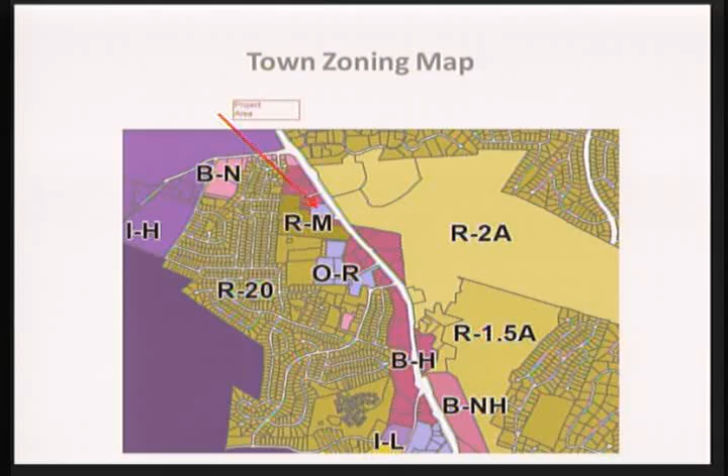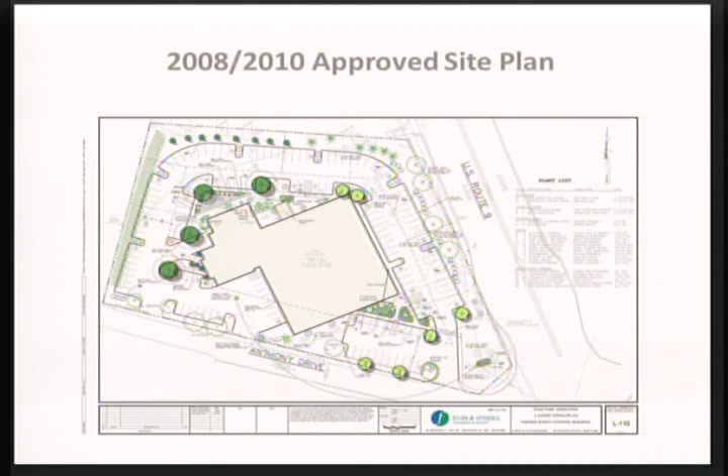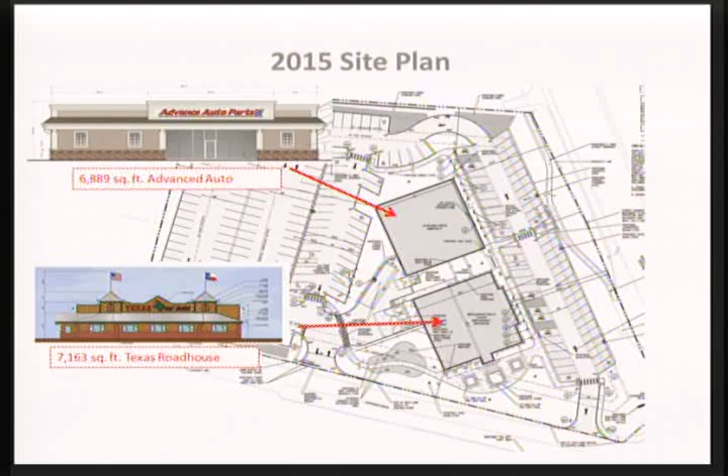Unfortunately, that project never came to fruition. So we're back before you in 2015 to receive site plan approval for 2 buildings. The first building, to the north of the site, is a 6,889 square foot Advance Auto building, and the second building, to the south of the site, is a 7,163 square foot Texas Roadhouse.

Just as a refresher, there are 192 parking spaces. We are utilizing the existing curb cuts off of Anthony Drive, which, as everyone recalls, is a private road for access into the site. We made a modification, Mr. Chairman, to the angled parking spaces in the front of the site. Previously those spaces were 90-degree with one-way access in, and there was concern about the ability of cars backing out to ensure they were going in the proper direction.

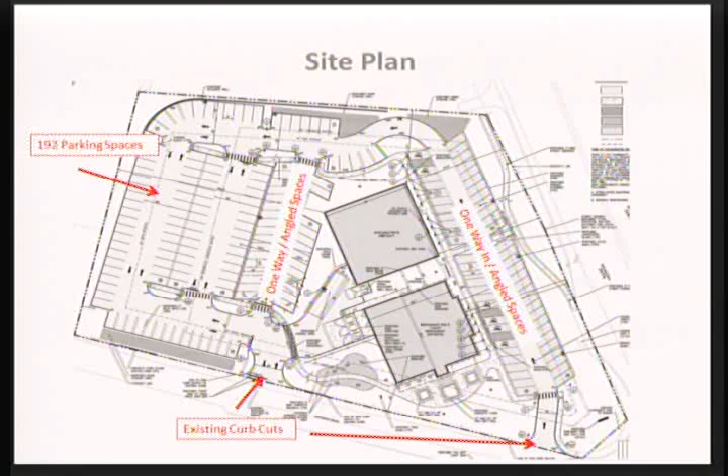So we went ahead with your board and your traffic consultant's recommendation and modified those so they're all angled parking spaces, one way in. We also modified the parking spaces in the back of the buildings for one-way as well. And the area in the front, as a reminder, is where we're getting our stormwater credits with the porous pavement.

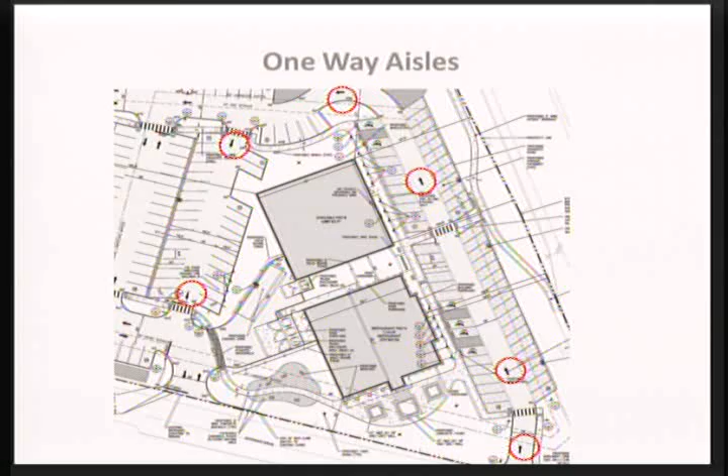For the one-way aisles, I want to touch on the signage and striping since there were some questions about that. We have arrows on the ground to direct people as they move through the site in the one-way direction. We have one-way signs on either end to assist people coming through, and do not enter signs in case someone comes to the westerly entrance in the back, so they know immediately it's one-way, do not enter, and go to the back for parking.

For the utility plan, since this was nearly an adaptive reuse of an existing building, the water and sewer are already on site. This would be the new water service, simply cut from the last building, so there would just be an extension of that water service and municipal sanitary service into the site as well.

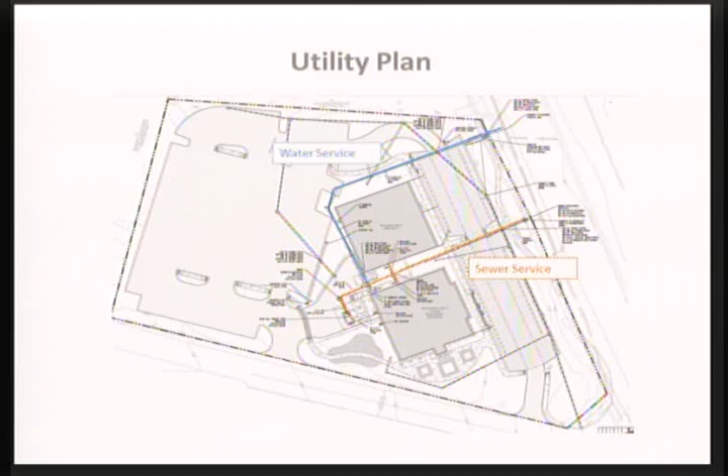For landscaping, blue represents the new sidewalks we're proposing. My apologies, my graphic design isn't as great as some of the other people who do this work. Sorry, let me go back.

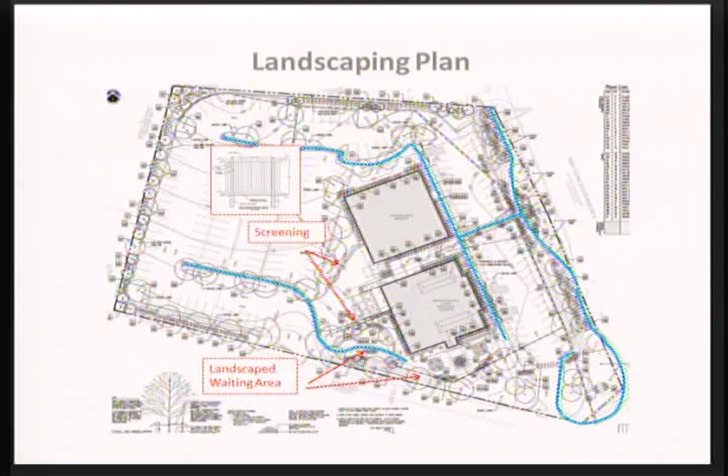We added some screening since you last saw this on the loading area in the back, two areas with a board-on-board fence, just to enhance things so people walking through aren't looking at that back loading and garbage receptacle area. There are also two landscaped waiting areas for Texas Roadhouse, heavily landscaped with seats, seating walls, and benches.

There's also a bicycle rack. I want to make sure we don't lose sight of a request made early in this process: we are proposing monument protection for that monument, a small wrought iron fence that will go around it just to protect it. I didn't want you to think we had forgotten about that. It's on the site plan, and there's a detail on the plan.

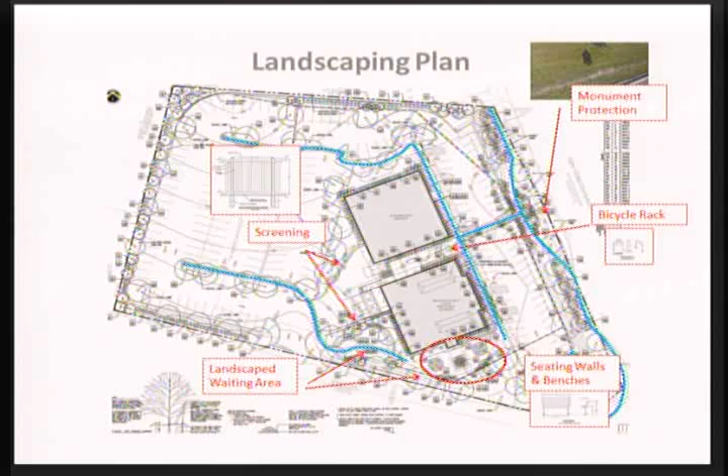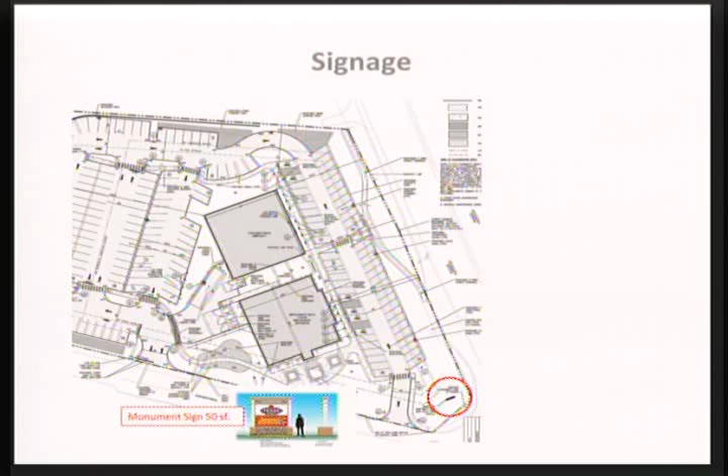For signage on the site, I think there were some questions about that. First is the monument sign, proposed on the southerly part of the site, 50 square feet, 2 sides, with Texas Roadhouse on top and Advanced Auto on the bottom. The detail for that was on the site plan, and the base would be a stone base monument sign.

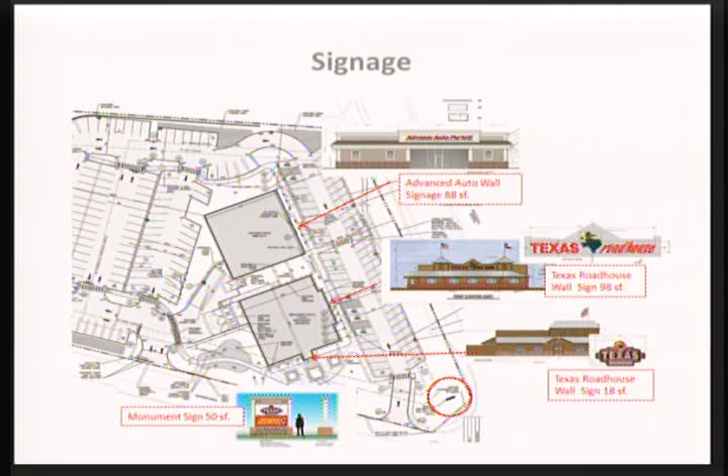Advanced Auto is proposing an 88 square foot wall sign on the east side facing Route 9. Texas Roadhouse is proposing two signs: one on the east side, a 98 square foot wall sign, and a second on their southerly side over the door, which is hard to see on this drawing, an 18 square foot sign. They did receive a sign variance from the ZBA last month.

These are the renderings for the buildings. The architects for Advanced Auto and for Texas Roadhouse are both here this evening to go over their renderings and the architectural components of the building. That's it, so if you have any questions, I'm happy to answer those for you.

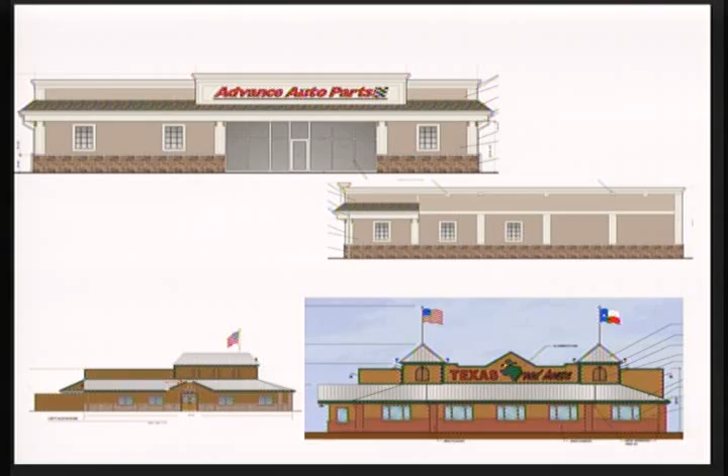Questions from anybody on the board? I think we're pretty familiar with it. Eric? Sure.

Liz Axelson, the consulting planner from Morris Associates, is not here this evening. You have a recommendation from staff and also from her recommending conditional site plan approval tonight. As you know, the planning board previously did a negative declaration, and the town board in January granted approval of the zone change to BH.

The comments are listed. There are some concerns that remain to be worked out, which we recommend can be handled with staff, having to do with the configuration of the parking spaces. Some of the angled ones should be a little bit wider, which may or may not result in the loss of a couple of spaces. Also, truck access needs to be demonstrated to show how it will work.

And a number of other smaller things, signage, some pavement markings. There's a number of things, but staff feels comfortable that they can be handled as conditions of approval. And then if the board is inclined, they can proceed with architectural review.

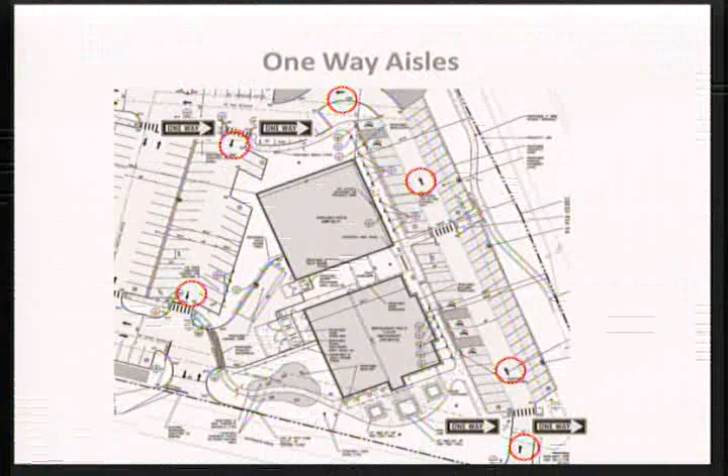But I've also been concerned about getting access - it wasn't just for the bus stop, it was also for people coming from the hotel. They'll be able to walk down along Route 9, and there'll be a direct sidewalk from the southerly to the northerly property line, and then another sidewalk that brings you up to the site.

So assuming that Chuck Walter is in concurrence with what the board wants, which I think he will be - I mean, we don't have a choice, we have to do what he wants at this point.

Isn't the one around the edge already ADA compliant? It's there, but it's not ADA compliant. Oh, okay. Correct, which is why we're doing the other one up to the center. Because that seemed redundant. Correct, that explains it.

I guess the only other thing then is thanks for the monument protection there, I think that'll be great. There's not too many of those Route 9 mile markers left. Right, that's true, good point. Thank you, Carl.

Eric has one thing to add. The board has the resolution of conditional site plan approval prepared by counsel and staff, discussed this afternoon - I believe it's 12 pages long.

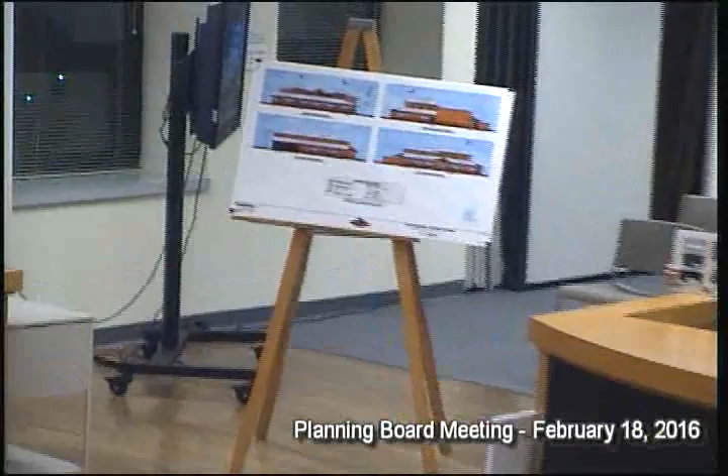We've got the brick for the base, as well as the cedar, as well as the Galvalume roof and CMU for our dumpster enclosure. Our dumpster enclosure is completely solid. It's an opaque finish as well as a gate, so you cannot see any of those items.

Our brick, I can get into the details of. Our cedar is a pre-stained cedar by Henry Poor Lumber. And then we also have the brick veneer, which is by Claymex, which is Old Denver, and that is also a reddish color. And then we've got the Galvalume roof, which is gray.

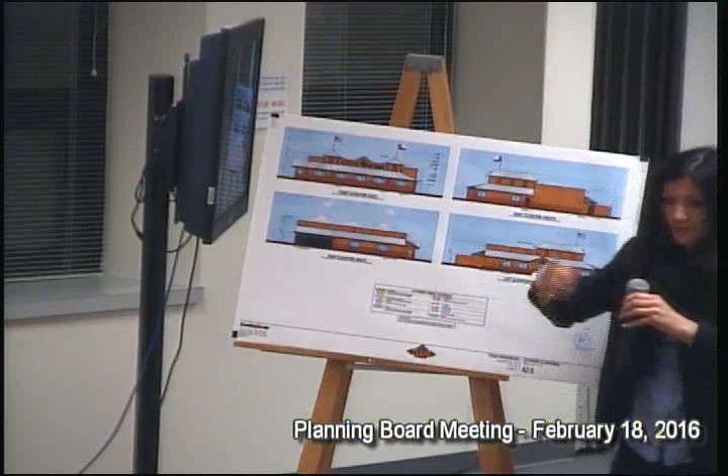And this, I'll just show them what the changes are. If you recall, one of the planner's comments was that this rear elevation needed to be improved. And what Texas Roadhouse did, just so you know the difference between last month and this month, is add this metal roof across the back, and this brick treatment wasn't there as well, so they added that in the back, so it reflects the other three sides of the building.

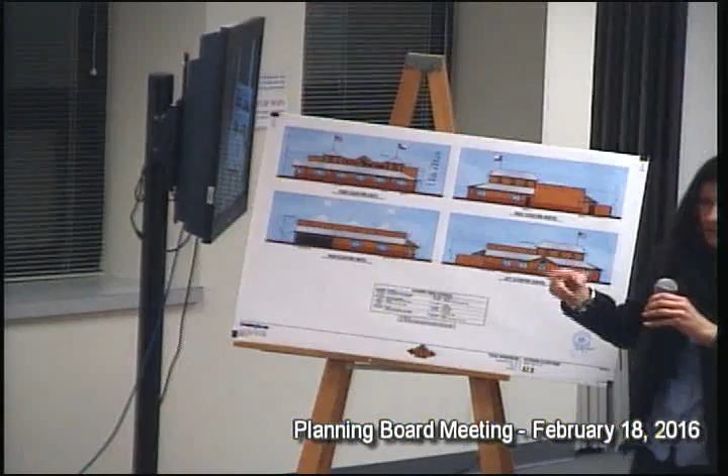So it's basically finished, they finished the back of the building too? Correct. Okay, that's good. We also did quite a bit of landscaping too, that was good. There's a lot of landscaping, a lot of benches, seating areas. There's brick seating areas. Yeah, it's going to be nice from that side. Good.

Kelly, are those changes shown in the elevations that were provided to the planning board? Correct, yes, they are in that. Correct. Okay, you have the same set. Thank you. And then we'll leave all these materials in case you guys have any questions.

From what you've shown, it looks a lot nicer than what I saw in Kingston, from a landscaping perspective. Oh, yeah, I think that's pretty stark, isn't it? Yeah, that's just like a parking lot. Yeah, it is. Sorry, I'm sure it's a nice site. It is. Ours is going to be nicer. It's nicer. Blunt honesty, right? Yeah, I've never been one to sugarcoat things.

Move that we accept the architecture as presented for both. Second, for both Advance Auto Parts and the Texas Roadhouse.

You got a second for the motion? All those in favor? Aye. Opposed? Motion carries 5-0. Thank you very much.

Good luck. Let's get the steak sizzling. Speaking of food.

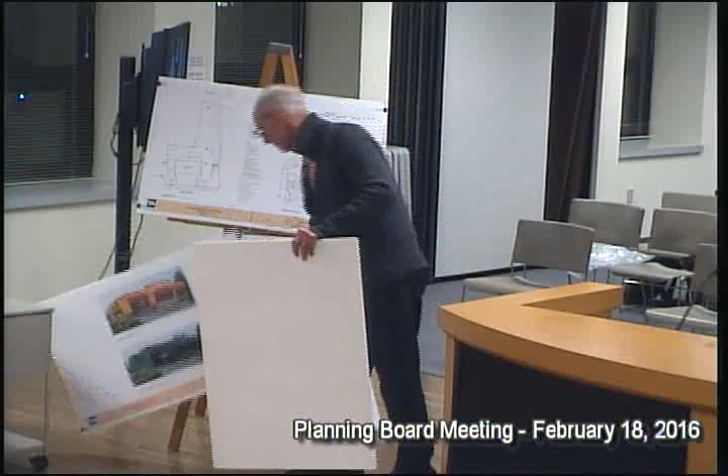A lot of different faces. Cool. You're killing.

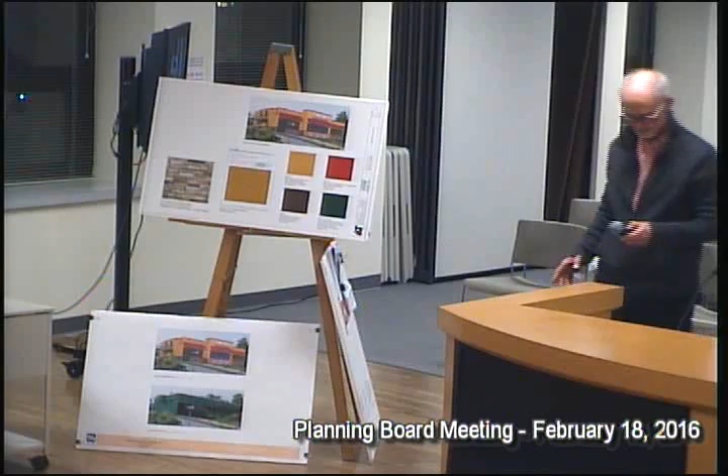The basic palette of the building is synthetic stucco and a synthetic stone base with accented metal canopies, and the fringe of French Quarter shutters and railing systems that persist around the other sides. There are a couple other little detail colors.

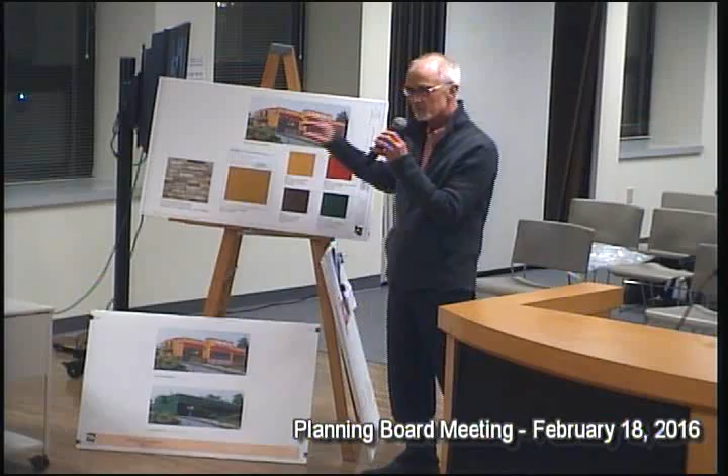Please ignore this sign on the side, we're going to be submitting fully compliant signage shortly. We got a variance for 2 monument signs, but all the signs we're proposing meet the size and other zoning guidelines, so just ignore that one.

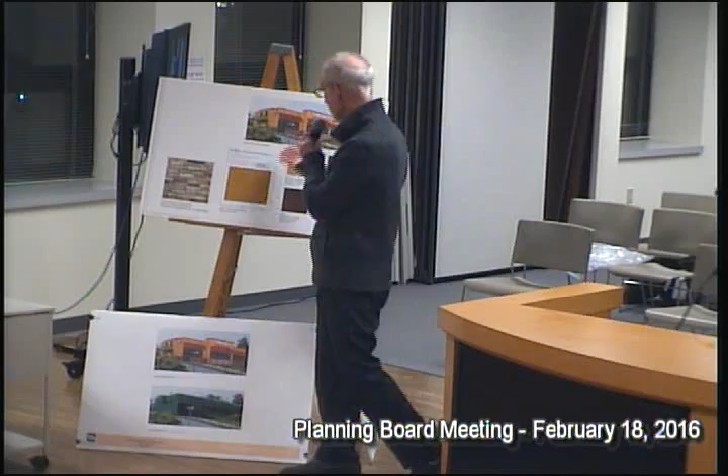This is the color palette, starting with the stone. It's a Boral Versetta stone product for the base, and these are the colors and texture of the stucco, which is the bulk of the building.

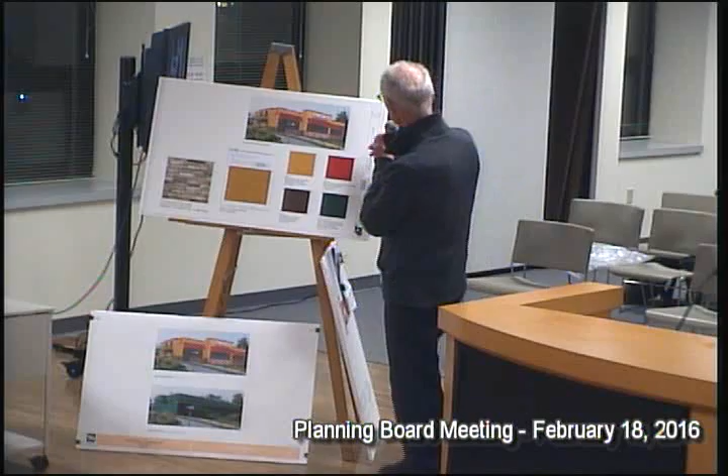Screen color on the window frames, the lights in the window frames. Doors and windows are this brown, the shutters, balconies, and some decorative light fixtures are the green. This is the canopy, and the base color of the building is this warm, orangey, sandy color.

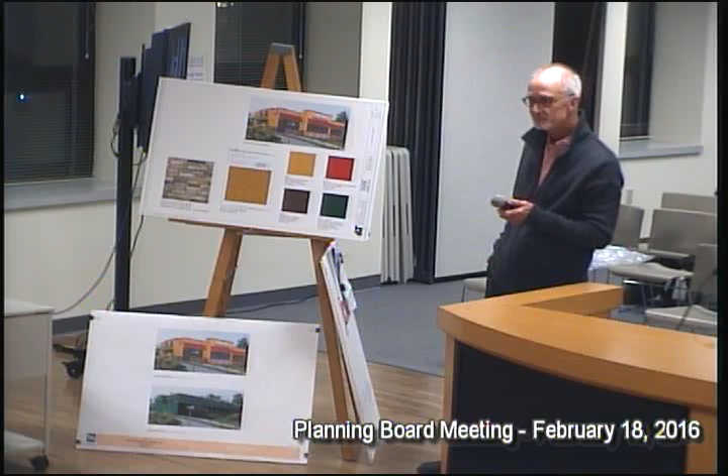You can put up the picture, just so you can see, there's a before and after.

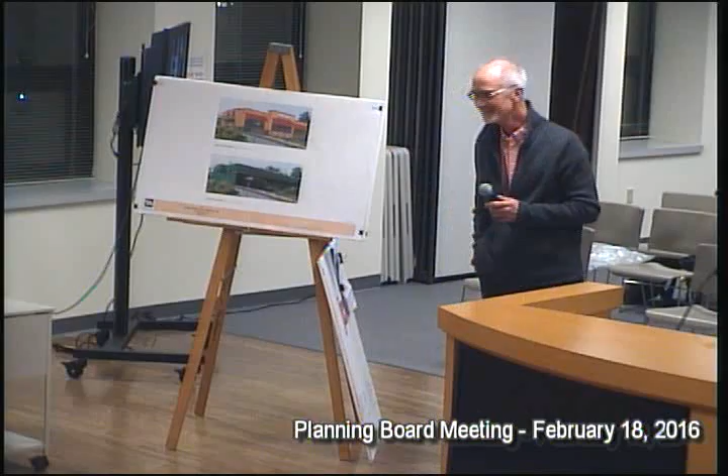A little better, much better. Looks like right out of San Jose. Looks good, yeah, that's the way they've done it. I like it, I think it looked the same down in Florida too, the same colors.

There's one, these are similar. That's the side facing Hyde Avenue. What's the side where most people are coming in from look like? That's the Hyde Avenue side here. Everybody's parking in the lot there and then walking in front. I was curious how it looks on the drive-through side.

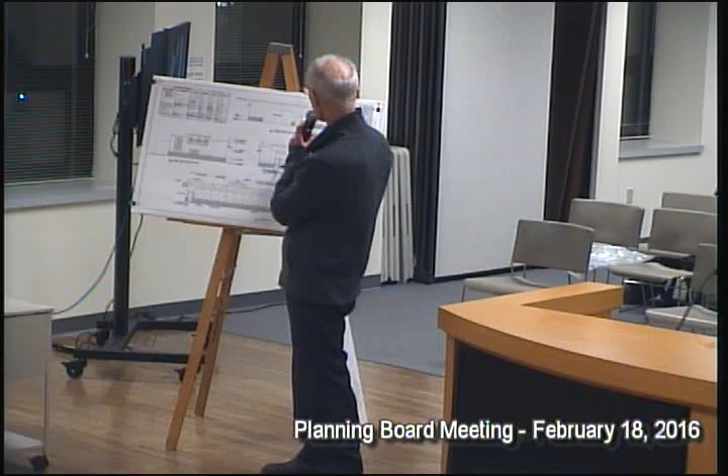Their elevations aren't colored, but the appearance is pretty consistent all the way around the building. The stone wraps around. This is actually the back side that faces Main Street, although it's pretty far away. But that's their walk-in, and we've wrapped the stone base all the way around. Here's the drive-through side, and here's the side entry requested on the east side of the building. So it's a pretty consistent look, all sides of the building have been respected and made presentable.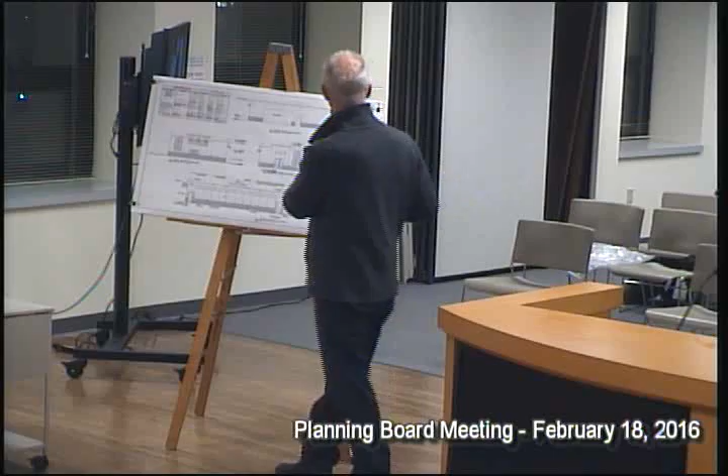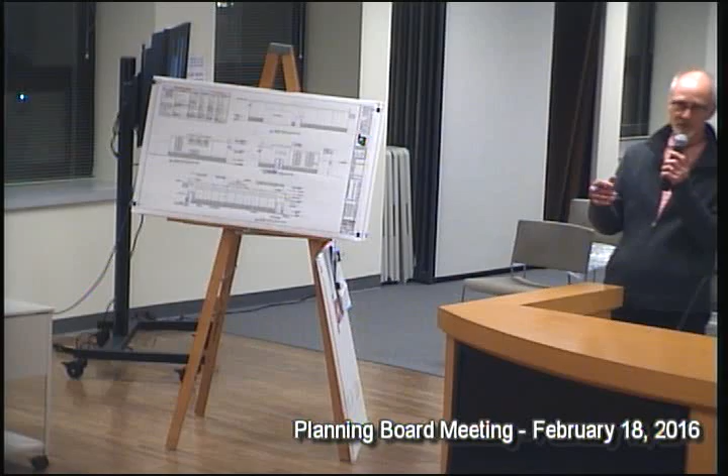Eric, does this copy the elevations identify the materials? Yes, they have, because the one the board got does not. Okay, I take it back, I think they have a chart here, but we'll clear that up with them and make sure the next submittal calls out the names per that sample board on the black and white elevations. I guess what I'm assuming we're going to do is a final submittal picking up all the comments, and we'll add that to the list of mods. Maybe not, depends on what's going on.

Did you address the screening of HVAC and roof equipment? I'm going to have to coordinate that with Taos Associates, the designers of the building. I know we need to do that, so I just need to get their mechanical specs and see how tall the units are. If we have to adjust the parapet height to do that, we'll make sure that happens. And what we'll do, so it's clear on the next submittal, is have them dot the equipment in on the elevations so you can see they don't stick up above it, because we're probably close enough to the street that you could have a sightline issue with a short building and sharp angle of view. Mr. Chairman, those two topics were in the conditions from December, and we moved them into tonight's recommendation to the architectural approval section, so they're incorporated as recommended conditions of architectural approval.

Good, covered, right? Not yet. Okay, any other questions? I have one. Eric, I noticed some places in town with drive-throughs have a height limit bar for trucks, I guess they don't want big trucks going through the drive-through. Is there anything like that? Yes, here we're going to be adding one of those. I just got Popeyes' corporate comments on the submittal and that's something they asked for. I didn't see it in their template set, but we'll add it to what we're doing.

Good, I wanted to walk you through the site plan. I wanted to point out that these are seasonal outdoor activities. The go-kart track actually gets demounted, taken apart at the end of the season. It's a barrier system, not built into the ground - these are movable, water-filled barriers. I think we presented this at an earlier presentation. They get stacked up and moved to the corner of the site, or moved off-site and stored until the next season. The ropes course is a permanent structure.

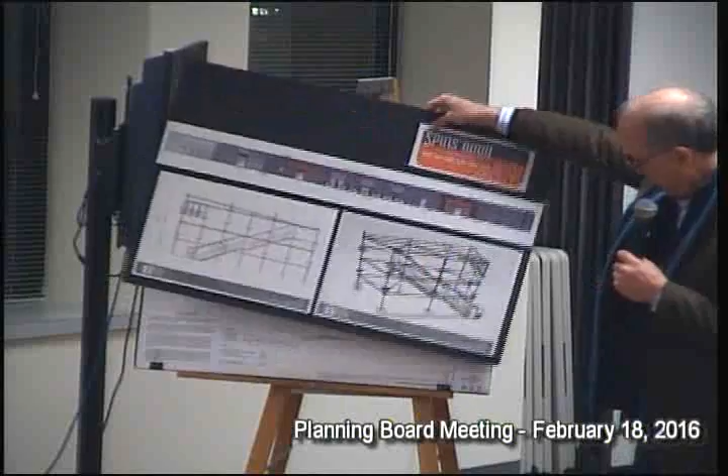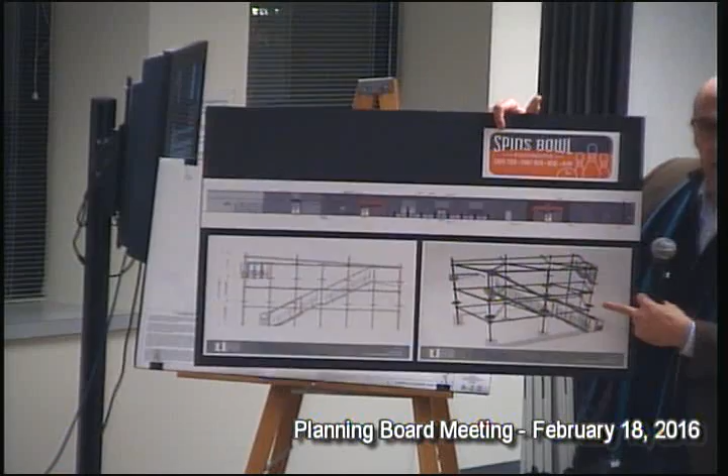This is the company that actually makes them. They're essentially posts that are set in concrete with footings and then bolted together. That is located here at the site.

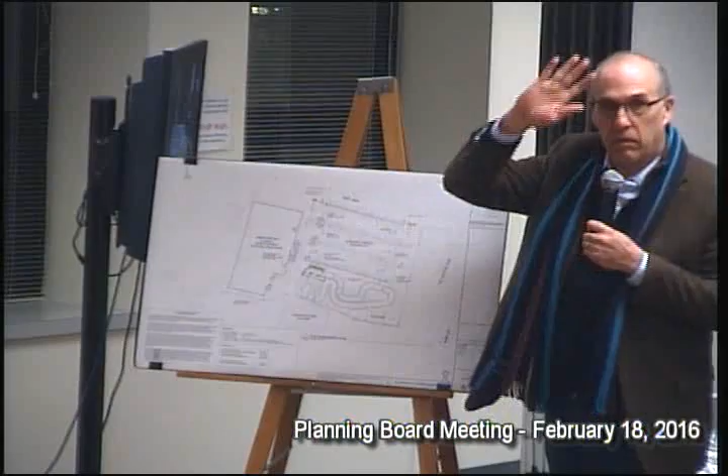So essentially what we did was take the least used portion of this existing surface parking lot, and we're going to lay out the go-karts, and permanently install this ropes course. You should know - and Bill can speak more to the ropes course - but this isn't people hanging off ropes. They're actually strapped into harnesses, and it's like a guided path on ropes with other beams and elements that they walk on. It's not like zip lines you see on YouTube. It's really safe, almost a pretend, extreme type of use. It's a lot of fun though.

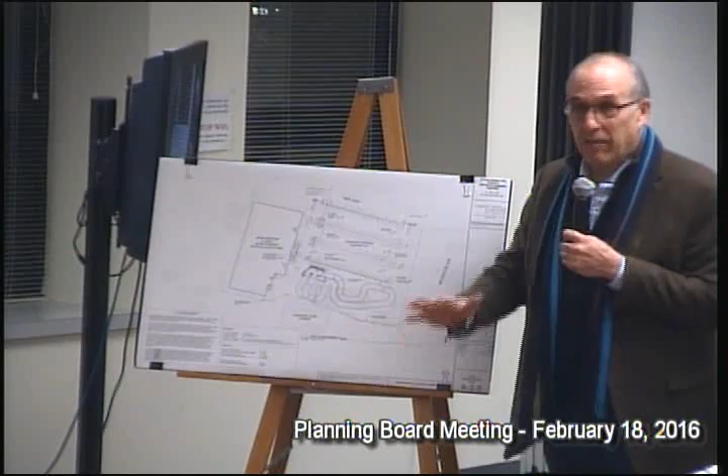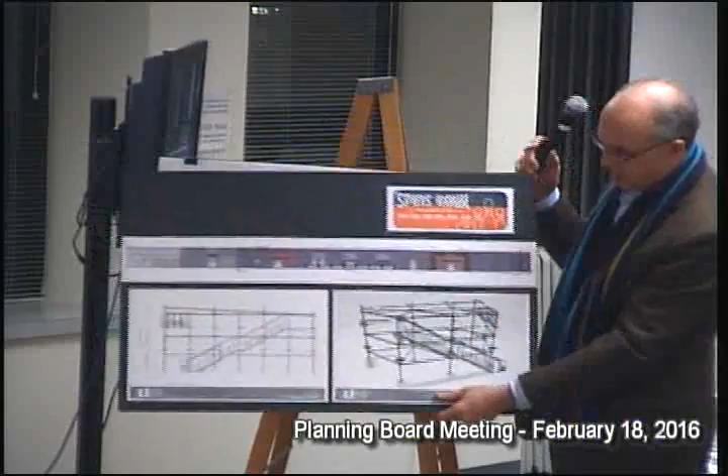So in response to that, we knew we had to try to make the site perform better. Part of it was how we handled the traffic, the cars coming in. This was discussed with staff, some of these ideas. These spaces over here are still there, but now under this track, because the current surface parking lot goes right to the edge of the property - it goes from here to here to here to the front of the building. So we're going to propose signage to make the traffic flow a little more obvious and safe and clear. Those spaces along the track, we're going to put wheel stops so there's no chance people could jump and somehow drive into the go-karts. We've fenced in a little waiting area, which is essentially the way you get up onto the ropes course.

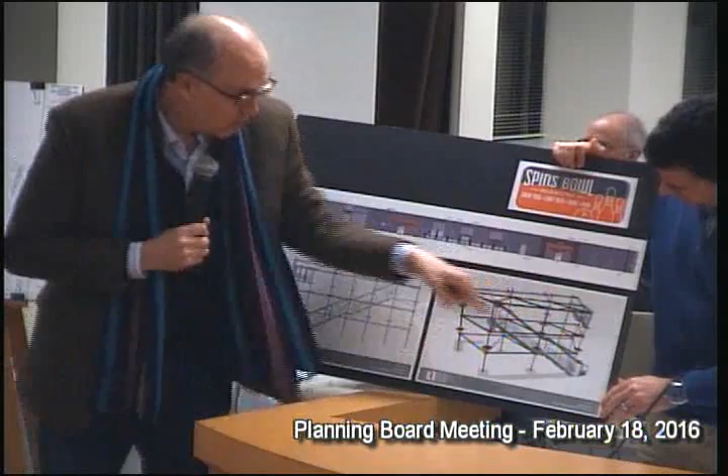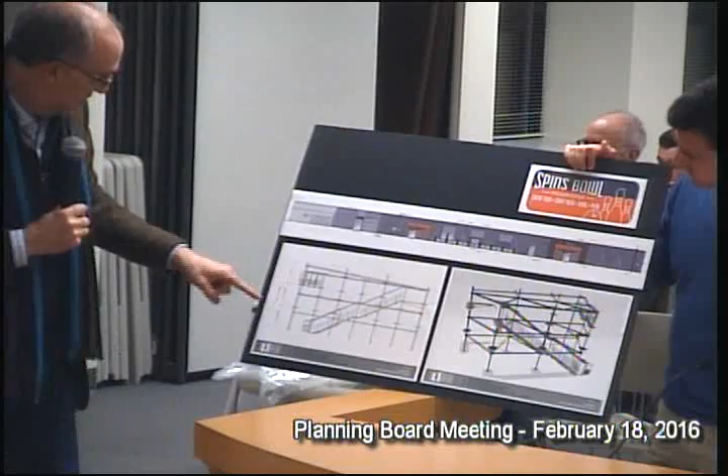It's a set of stairs. You get strapped into your harness at the bottom of this thing, and now you are guided up a set of stairs, and now you're sort of let free to wander in the course up in the air on the elements. The height of this thing at the most is 36 feet.

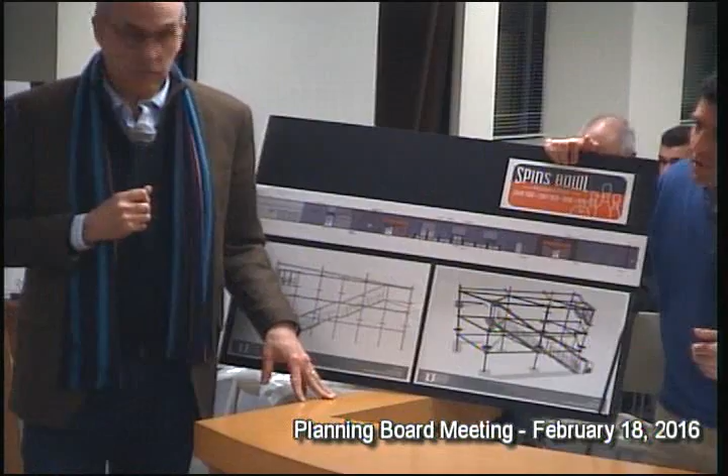When you say wander, can you have somebody pass each other if some kid wants to turn around and go back? It's a good question. There's actually different pathways, different elements of different complexity or skill level, and there's areas you could go left, right, forward. So you could go left, someone behind you could go right, or vice versa. The person in front can't turn around and go back. Well, if no one's behind you, you could turn around and go back and then go a different direction. But if somebody is behind you, you'd have to keep going forward.

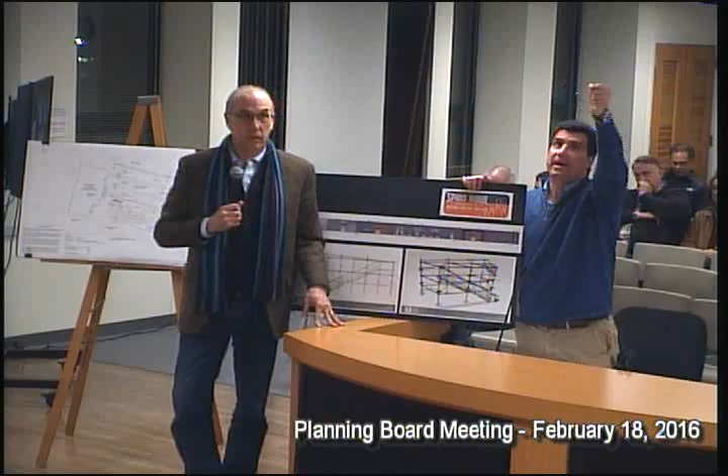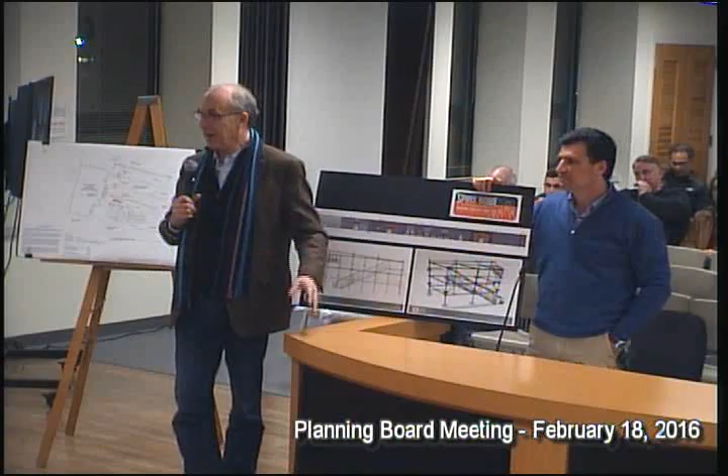It's, I assume with the latching of ropes, you can't turn around because you'd have to unlatch it? No, it's actually just a channel. So your harness is in a channel. Imagine this is the beam, and where the frame for the drop ceiling is a channel, and at each of these points you could go left or right. So it's just that if there's somebody right behind you, it's like being in a one-way corridor. You can't turn until you can make a left or a right. Exactly correct, yes.

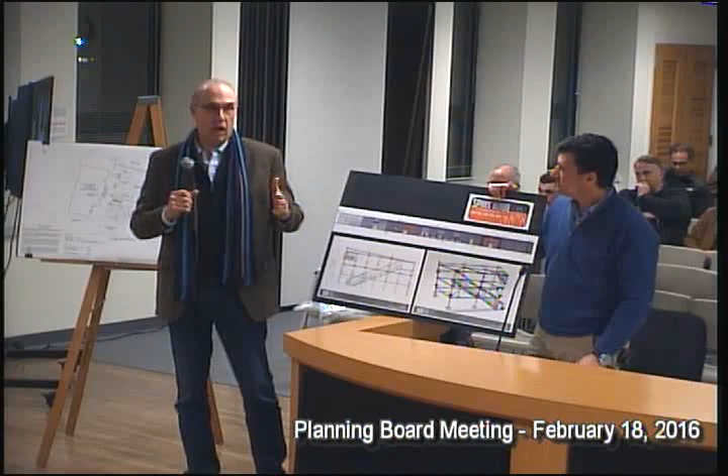So other elements of the site that came up when we were talking with staff was trying to anticipate diminishing the sound of the go-karts to the edges of the property. At that time, we had identified some areas that seemed to make sense to do that, and we were proposing some fences from the back corner of the overhead door company along this property line.

It was to end there because this is actually a commercial user, these are residential users. We were aware that there was a potential sound and wind alley along the side of our building to the residential property owners here, so we put a fence in that gap. It has a door in it because I also have to maintain it as a fire exit path.

We were also proposing an outdoor eating area up against the building, also seasonal, not permanent. It's really where the restaurant lounge is currently, just outside of that, and easily accessible from the kitchen. There was a suggestion that instead of doing just very movable fencing, we should do boxed planters with some fencing between them to make it a little more robust in case a car should somehow come through.

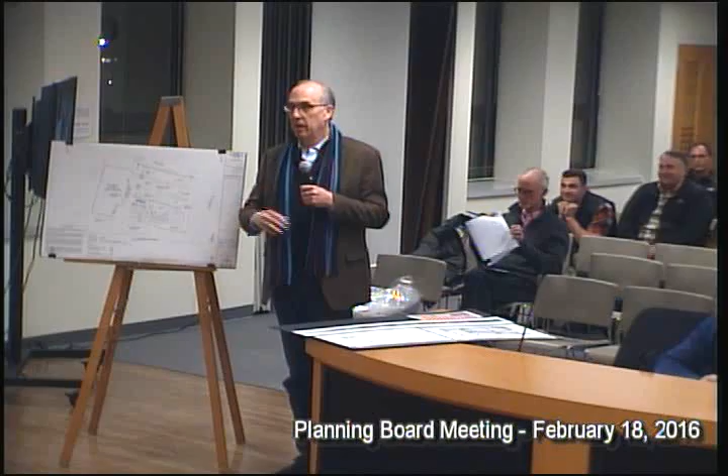They were meant to be more robust than a flower pot - you're gonna have to show us that that's enough to stop a car. Oh, look, if it was a bollard, we don't care. We can put a bollard. We'd have to look into the easement issue. Bollard, or maybe you want to put up a guardrail of some sort. Sure, it's just that the bollards are permanent, so you've got to take into account when that seasonal room is out. That's correct - unless you have the kind that retract into the ground, but that's a little more expensive.

As well as by the go-kart area too, I think - something to keep cars out of there, more than the water barriers. That's good for the planter barriers there, because the only place that people congregate is sort of at the bottom of that stairs I was describing - kids and parents sending them off will stand there and then they go up. By the way, all these activities are handled by staff.

This isn't passive. The issue again is, can a car come over that rise? It was mentioned that either bollards or some kind of stopping device was suggested. You gotta take a look at that. What if the accelerator gets stuck? We had this issue with the one on Route 9 that never got built, but that was a concern. We wanted bollards, something that would protect the people sitting there if a car got out of control. We could put bollards in front of the food area, or it might be easier just to put in a guardrail. I don't know, you just gotta take a look at that. Something, wood or metal.

Yeah, I think it's just another one of our checklist items to certainly look into. Good. Okay.

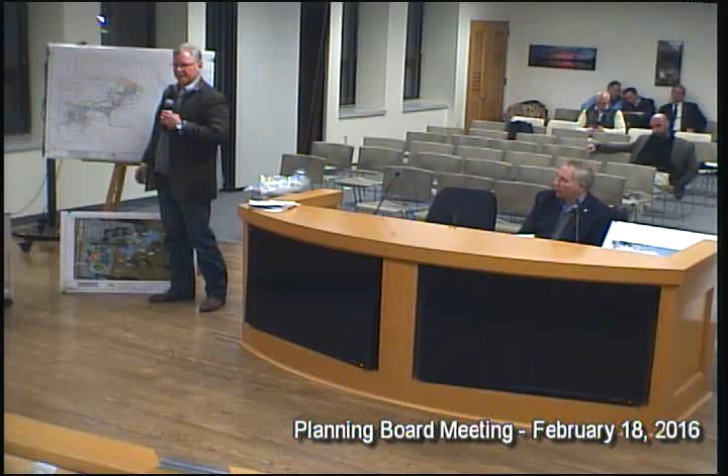If it doesn't rain, is there going to be an auxiliary source of water to keep these ponds full? There's an irrigation line that loops the green, so we'll tee into that line and go into the lake, or the pond. The source of water in the irrigation line is another pond someplace? Yes, it'll have a lake feed, that's the way we do it. So you won't be able to fill it all at once.

So where is the pond that's feeding the irrigation line? Is it on this property? It's back behind, you can see it on the aerial. That's what I was trying to picture. You need to get the answers to those questions.

In a drought year, like last year, how was your irrigation pond? It's pretty big. Those are good questions.

I'll follow up, there are several ponds on site. There's one up in the way back, by Wilbur Boulevard, and you don't want to drain that because that's where my house is, I don't want to look at the bottom. No, it's not, we won't drain your pond. But then there's another one near the par three, up towards the plaza and the school. You can do some research on these, you don't have to give us an answer now. Good questions, but they aren't that big.

When you think of a pond, from there, it might be, because this is to some scale, probably 30 feet. This green is about, I think, 6,000 square feet, so you can see it relative to the pond, so not a huge lift here.

The irrigation pond, is that one excavated or is that a natural pond? I don't know, I think it's natural. Are these ponds going to be lined with plastic liners? Yes, they have to, again these are A soils here. That lower pond area, there's a natural depression there now, so it kind of lends itself to that, I think.

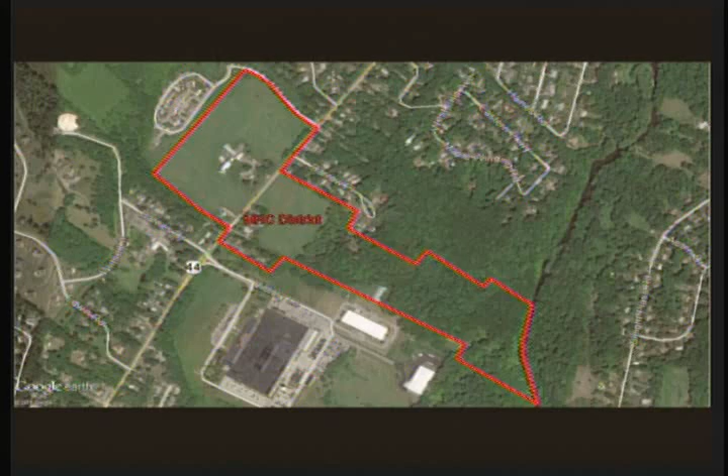What we did recently is acquire the property on the northwest side of Route 44, the farm property, because the purpose of this project is to create a town center, which really requires the whole area to be part of an application. We originally were going to propose something on the other side, but I think the continuity of bringing them all together to create that town center enhances the program we're bringing forward right now.

As I indicated, back in 2007 the town adopted a new town plan, and following that was the new MacDonnell Heights Center zoning. This is a list of bullets about what you're trying to achieve in this zone.

A mix of businesses and residential uses, the ability to park once and walk to facilities as opposed to driving from strip mall to strip mall, and minimizing the visual impact of parking. In other words, we try to have the streetscape dominated by pedestrians and buildings as opposed to parking lots, and that's what we're attempting to do.

This is an important one: creating that critical mass of employees, shoppers, and residents, which is why the mixed use of the project is very important to the success of the project.

We have a residential component.

We have the residential component and the commercial component of the project, and I think they actually support each other very nicely in terms of being able to have that critical mass that the town's looking for.

Again, this speaks to the parking and being able to walk from unit to unit. There'll be some green spaces, public gathering spaces. There's actually a very large area we're looking to preserve as open space and make available to the public, trying to create various housing opportunities.

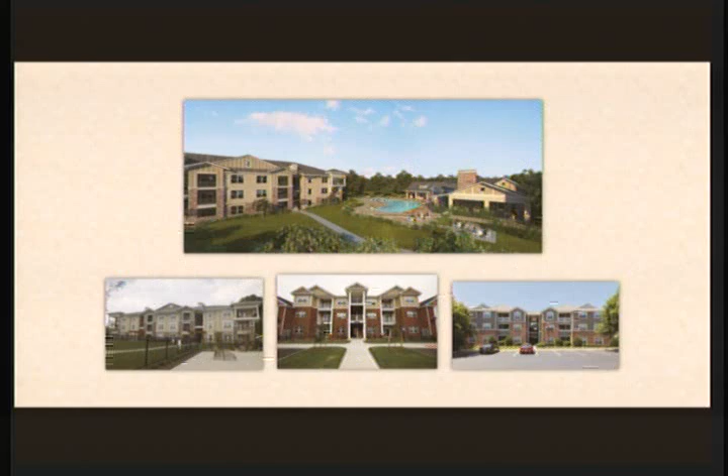Some more inspiration. This is actually Brookside Meadows in Pleasant Valley. And this is the first rendering that was created of what we're thinking about doing in the community.

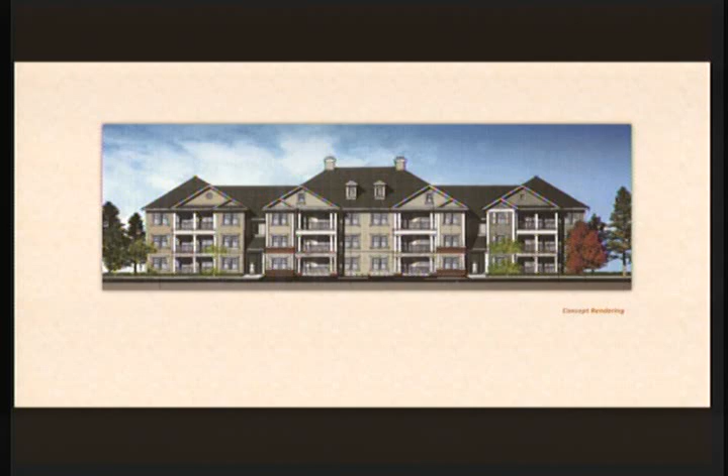And this is our concept plan right now. So, along Route 44, which is running up and down on the drawing there, north-south, we're creating a traffic circle. On either side, we're looking to load it with street-level commercial.

Is that, that'll help. Yes. As soon as I get the laser, and I'll try not to point it at any planes flying overhead. Now you get to see how nervous I am when I'm trying to point at the screen. I'll let Joe do it. What am I pressing here, Joe? Okay.

There we go. Here's where we're looking to do the traffic circle. Route 44 is running here. This would be 2 boulevarded entrances going back and forth on either side of Route 44, lined by commercial uses. The residential component predominantly is proposed here. Right now, that's laid out as approximately 288 residential units. Additionally, we're looking into some townhome units through here to create a buffer between the community next door and the commercial uses.

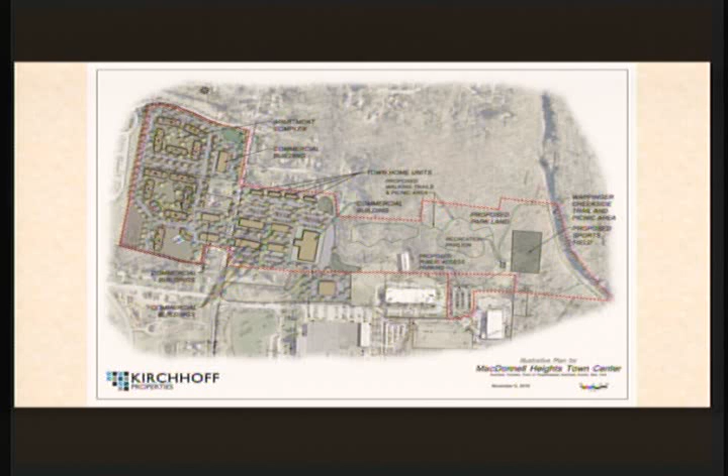You'll see in a couple of slides to come what it looks like down in that area, and it's quite nice. In addition, outside the MacDonnell Heights property and project is a parcel that Joe and his partners own right here that we're proposing to actually create public parking for access to this recreation area. Yeah, that would be great.

With a bike rack. With a bike rack, of course.

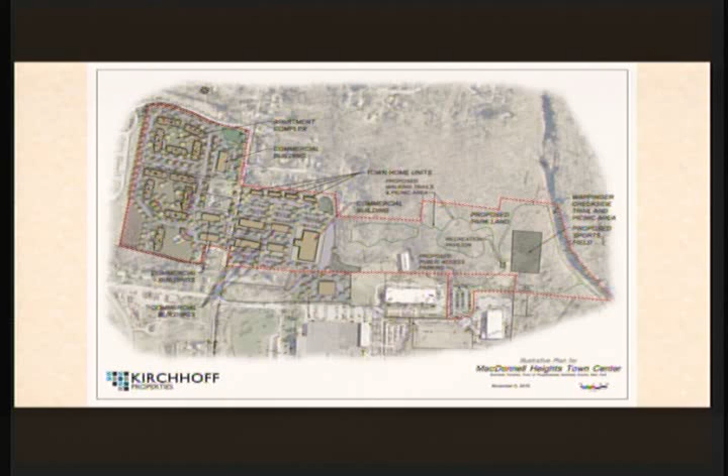Let's see, move this car charger along here. Some of the additional benefits of the project - we're proposing to acquire and expand the existing Poughkeepsie Business Park wastewater treatment facility. The design of that facility is going to be such that it can be readily expanded to serve other areas within the town.

So the potential - I know that there are some wastewater disposal issues in the immediate area - this may be the first step in terms of being able to address those by the town. Traffic control, interconnections and access to Route 44, we just discussed. And public open space and recreational amenities - you have access to the Wappinger Creek, the walking trails and picnic areas, the public parking, the sports field, and a recreational pavilion.

So on our side, even in the biggest storms, it comes right up to the edge a couple times, but it's never flooded the area that we want to use for parkland. The other side gets in trouble because it's a lot lower.

I know LaGrange CAC did a big project with a trail along the creek, I think. I'm not sure if it's in that section or not.

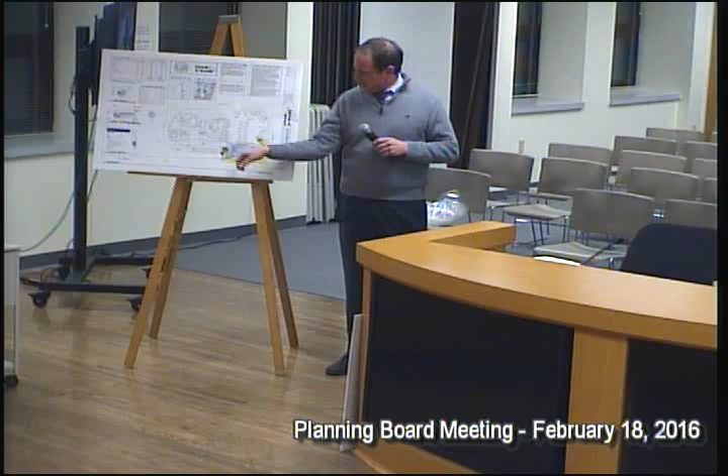The north end of the site is where the cars that exit the car wash use the vacuums and the vending station for different products. The existing canister vacuums are going to be removed. The vending station in the middle of the parking area is going to be removed, and there will be 7 parking spots with a new modern style vacuum that is being installed at most facilities now. I do have some pictures of that.

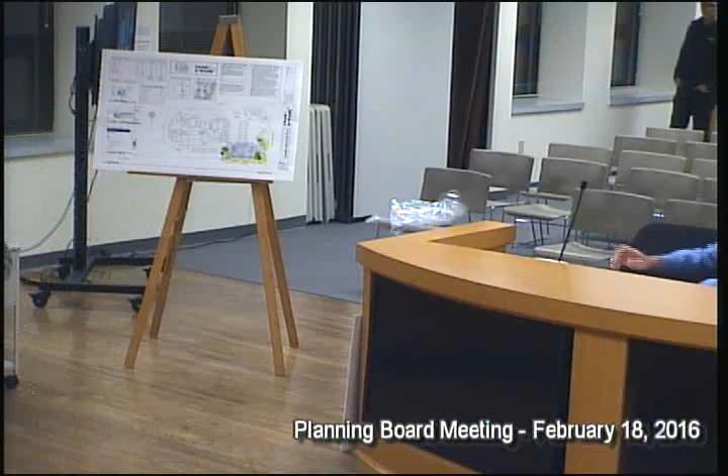Get out of town. Get out of town. So these have been installed in Wappingers and in Newburgh at the Foam and Wash.

So you get one of these stanchions on each side of your car, and then it's really convenient for vacuuming your car from each side. You don't have to drag the hose around, and then the hose is stored back into the stanchion, so you don't get people leaving the hose on the ground.

So are these free too, right? They're free, almost. We waited all night to give it away. As well you should. Do those hoses pull back in or something? The red one's a hot vacuum and the blue one's a cold vacuum, I think. It's the size of the nozzle. Different size of car, different pressures.

Suctions. So okay, other than that looks good to me. We're adding a sidewalk behind for people to access it, and that's pretty much the extent of this application.

You got a vending machine now with the towels and all of that stuff still? There's 2 smaller vendors that'll be out on the sidewalk. That was part of the reason for adding the sidewalk. They'll be out of the parking area now. Right now that vendor's out in the middle of the parking area.

I mean, when I come out of the car wash, often all the slots are filled. This is going to make room for another one. It will, there'll be 7 spaces there. The parking lot's along the north side. So you got the vacuums, and then the sidewalk, and beyond that's the diner. That's correct. Does that help?

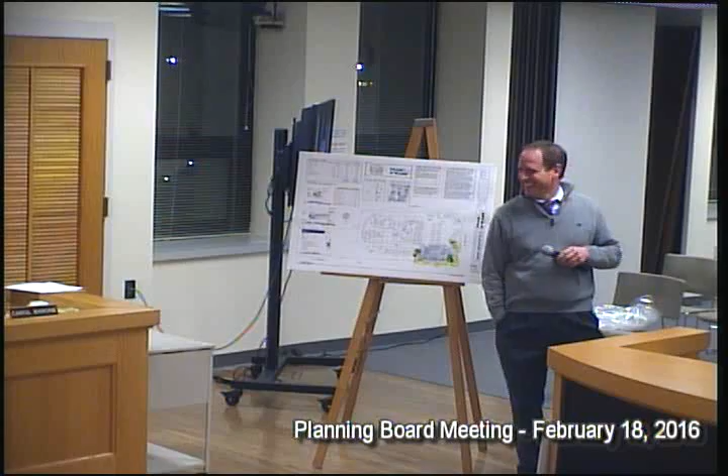Considering what they're installing, I kind of thought this one sucked myself, but it's a vacuum cleaner.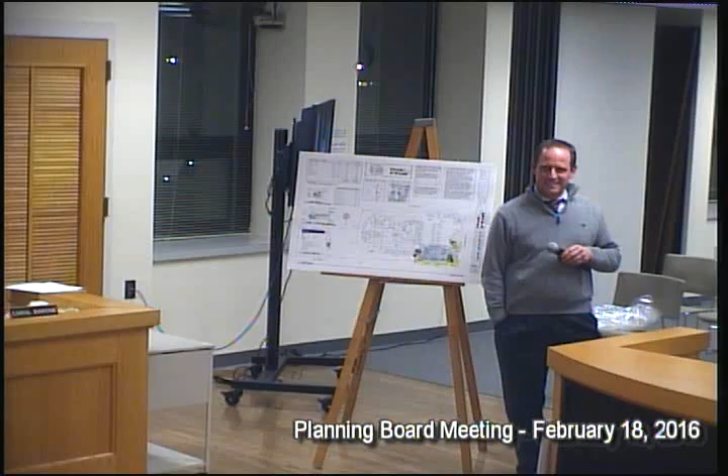I move the planning board determine that the proposed activity is a Type 2 action and is not subject to SEQR review pursuant to 6 NYCRR 617.5 sub C sub 7 of SEQR regulations. Seconded. Call a question. All those in favor? Aye. Opposed? Motion carries 5-0.

Move the planning board waive the site plan public hearing for this project in accordance with Town Code Sections 210-151D. Seconded. Call a question. All those in favor? Aye. Motion carries 5-0.

I move the planning board grant conditional site plan approval for the Foam and Wash site plan amendment subject to the following: 1A, and there's a few little things here for staff to take care of, so it's 1 through 5 basically. Seconded. Call a question. All those in favor? Aye. Opposed? Motion carries 5-0.

Thank you, thank you very much. Are you going back to the free towels too? No, they have those green towels, they wash them now. You can hand it back, or pay for it and give it back to the guy, he gives you a clean one. Gary hand dries every car now. John, you don't want... Thanks, guys.

Poughkeepsie Plaza facade renovation, architectural review for exterior renovation of the south facade over the Modell's and Pastry Garden store. J.D. Singh again, Maury Architects, Poughkeepsie Plaza. We were here about 2 years ago for the facade review of the old Blockbuster building, which was renovated, and Sleepy's is there now. So that style facade is going to be extended down the south-facing side of the whole north wing of the building, across Modell's, across the Asia Buffet, Phoenix Salon Suites, and down towards the Pastry Garden.

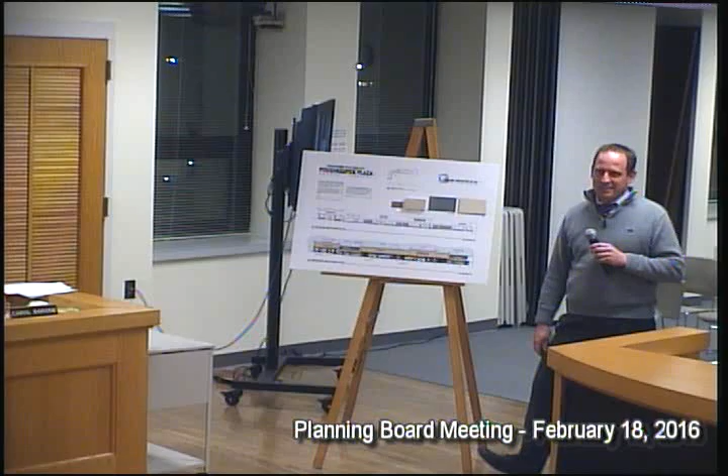So if we don't approve this and say you have to do the whole thing, then what? If you don't approve this, then we're never going to do anything else. Those brick columns, are you going to try to match what they did at Sleepy's? The brick, all the colors, it's going to be identical to what Sleepy's is. Okay, same materials.

But never say never. I move we accept the architecture as presented, with the materials he's got up on the board. Seconded. All those in favor? Aye. Opposed? Motion carries 5-0. Thank you.

Jay, on the front of the columns you're keeping, are those no parking signs? Yes, that was one of the comments. Those will be the no parking signs, no lights. No lights? Nope.

South Road Square, okay, you're up. What happened to Bugaboo? Sure, what happened to Bugaboo? Bugaboo closed everywhere, wherever they had locations, the company went out of business. Did they all close? They all closed. Oh, okay, didn't know that.

They tried to change the menu and switch it over to just a steakhouse? But what happened was they sold the company to a bunch of investment bankers who didn't know anything about the restaurant business, and they ran it into the ground, and the company went down and closed all their locations. God, I hate when that happens.

Ouch, you tell them my grandkids are mad at him. Yeah, my grandkids liked that place. We weren't too thrilled about it either. I'm sure. Well, they're still paying rent, I hope? Their lease up? Oh, they stopped paying rent many months ago, which is one of the reasons we're very anxious to get a new facade on our shopping center.

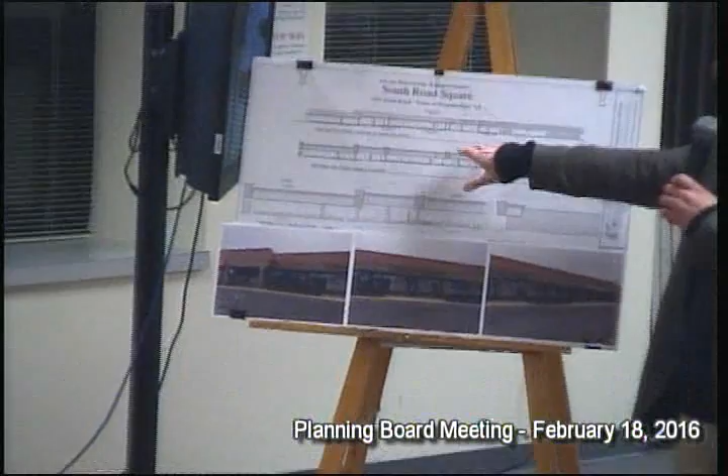This drawing here represents the upper elevation, the existing facade as it exists today.

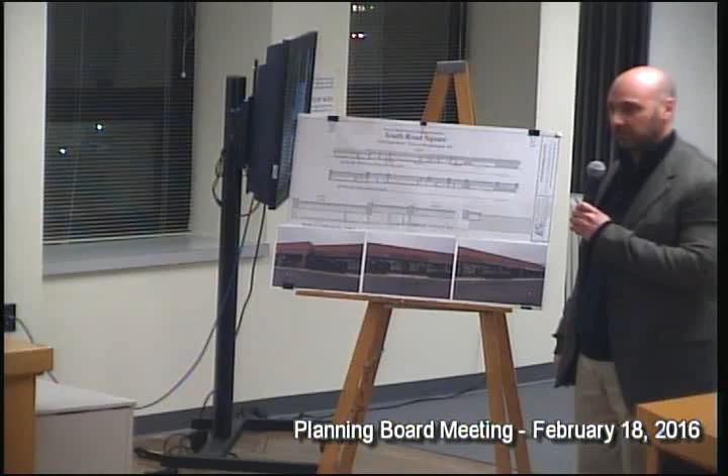So for clarification, it does not include Bugaboo? This does not include Bugaboo. Reason being, actually we will probably want to extend through Bugaboo, just to clarify. We will want to, we are working with...

You can just turn it on. Sorry guys. And if you could just introduce yourself? Yeah, got Bugaboo, or the other. So the last guy said they wouldn't do the whole thing. It takes, turn it on and then wait 3 seconds.

Hello, there you go. I'm Jim Kempner, I'm the owner of the shopping center. We are working with a potential restaurant user now that will want the same materials we're using on the rest of the side, we'll just extend right over onto it.

So what we approve tonight will be the entire length of the... That is correct. Okay good. Because the drawings only showed that. I think the reason why we didn't include that was because they're actually waiting for a potential client, or a potential tenant for that space.

Oh, so until that happens, then we'll be here again. Well no, we're gonna approve the whole thing. Yeah, it'd be best to approve now. If you need to come in to change it because the tenant requires something a little different, we can talk about it. Right, good, that's fine. I guess that's the issue.

But in terms of what we're showing here tonight, this does not include the Bugaboo portion. So it's not on this map, you're saying? Yeah, it's not on these elevations. So you'll also give us a new elevation that does include it. That's what he just said. Okay, if that's a condition of the approval, that's fine.

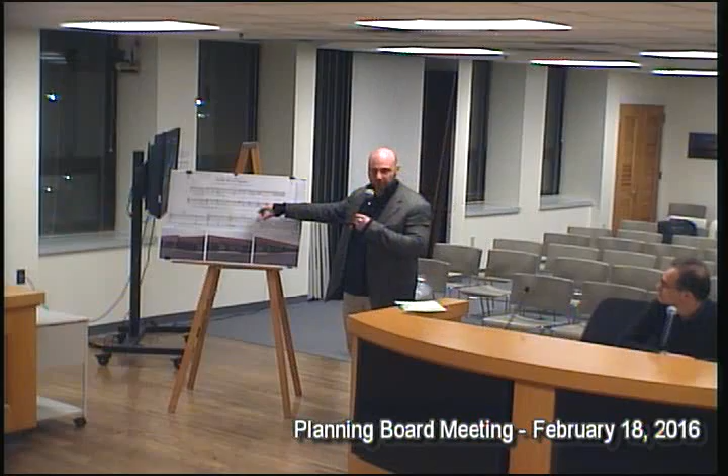I have some samples here. The colors are, there's two different colors. It's called Cloud, which is a Sto color, and the other one is Putty color. And I have samples of the finish, this here, it's a medium texture. It's standard stuff, I'm sure you've seen it before.

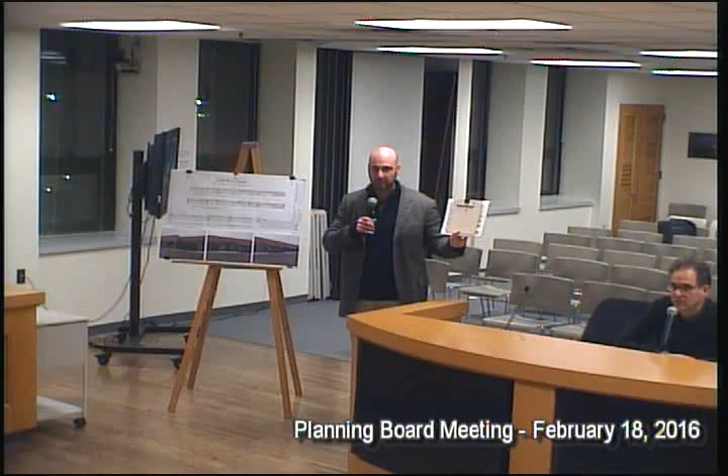And that goes on which part? It's the entire upper portion of the building. And then just to add, where the split-face columns exist, we're gonna do these upper pillars to break the facade, because as it is now, it's just kind of bland.

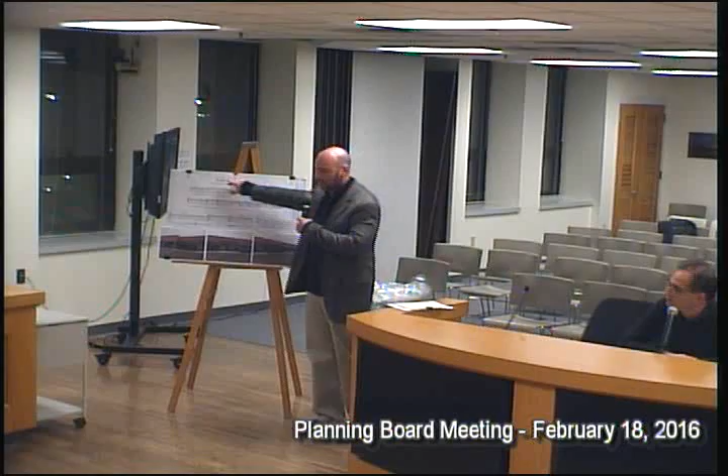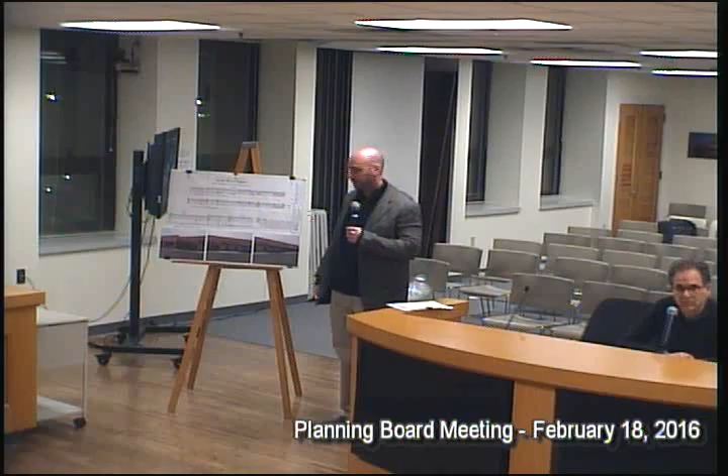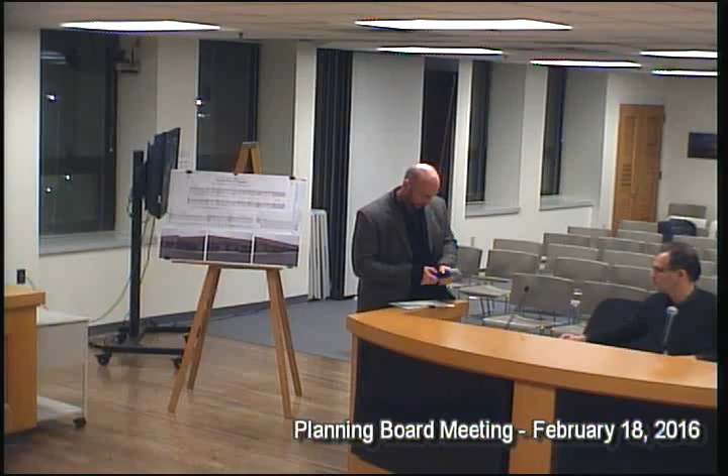Those upper pillars are the same material though, or different? It's all EIFS and the colors are inverted from the main facade, where the signage would occur. So show the two colors again there? That works. Those are the two samples. So what are the two colors? I only saw one. There's a little tiny square on top, a little bit lighter. It's gonna be a hell of a lot better than what we got.

Make sure we indicate some time limits and brackets - they're fairly close. I think this is gonna wind up basically looking just like across the street, like most of the other shopping centers. Unfortunately, I was hoping for a little more creativity.

What about the base - any kind of brickwork, or is it just clean? The split-face block, what is it called - will the existing split-face block remain? Does that need to be cleaned, washed, or sandblasted? It's in very good condition.

I move that we accept the architecture as presented, subject to Phase 1, Phase 2, the revised drawings, and we'll put some time brackets on when the work has to be completed by. As soon as the weather turns, we'll get to work - we're anxious to get going.

If your tenant comes in while you're working on the right end of the building, and you need to come back for a change on the left end where Bugaboo was, we can work with that. So if the restaurant tenant wants to continue this, we don't have to come back before the planning board - that's essentially approved. If we change it, then we'd have to come back.